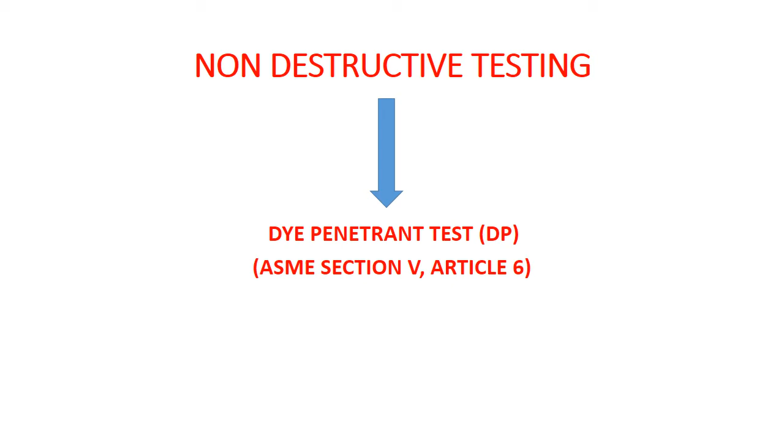Dye penetrant test is one of the techniques in non-destructive testing, and the code of procedure for dye penetrant testing is ASME section 5 article 6. ASME means American Society for Mechanical Engineers, section 5 is non-destructive testing, and article 6 is the dye penetrant test.

Why this dye penetrant test? Because it helps identify surface opening defects like cracks, blowholes, pinholes, porosity, etc. The basic principle of dye penetrant test is capillary action.

In dye penetrant test, what is penetrant? Penetrant is a colored, low viscosity liquid. Viscosity is the resistance to flow of liquid. The viscosity of a good penetrant is 0 to 5 centistokes, and the temperature limitation is 5 to 52 degrees centigrade.

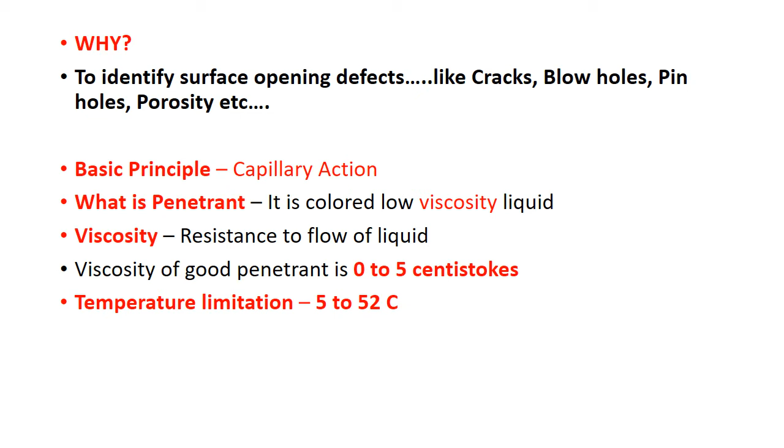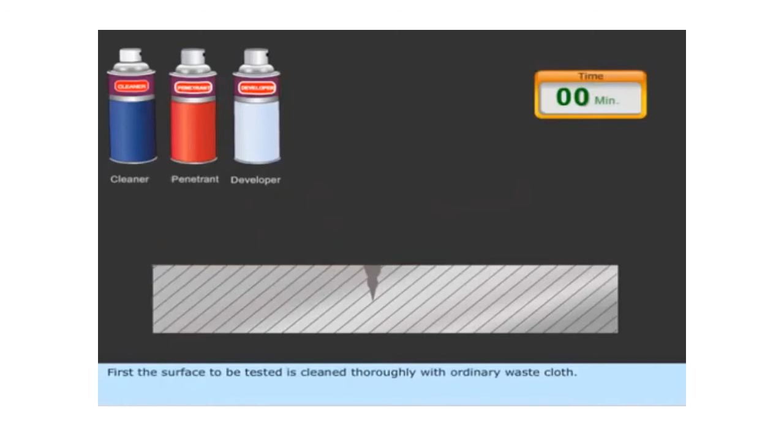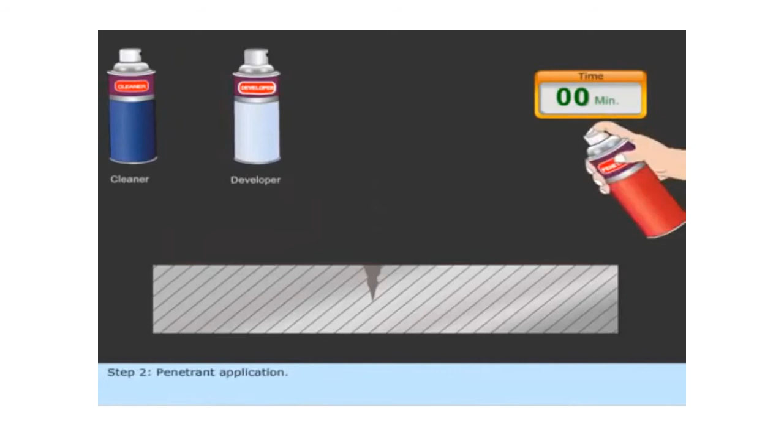In this video, you can see how this process is going on. Step 1, cleaning: clean the surface thoroughly with waste cloth by applying cleaner. Step 2, penetrant application: apply the penetrant with 1 feet distance and 45 degrees angle, and wait for the dwell time of 10 minutes.

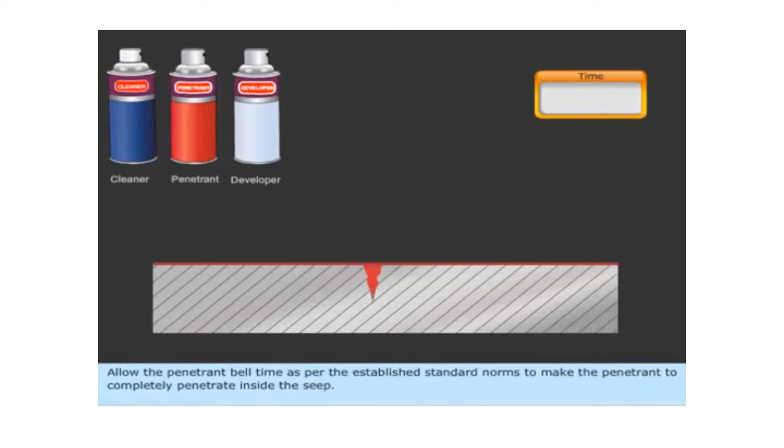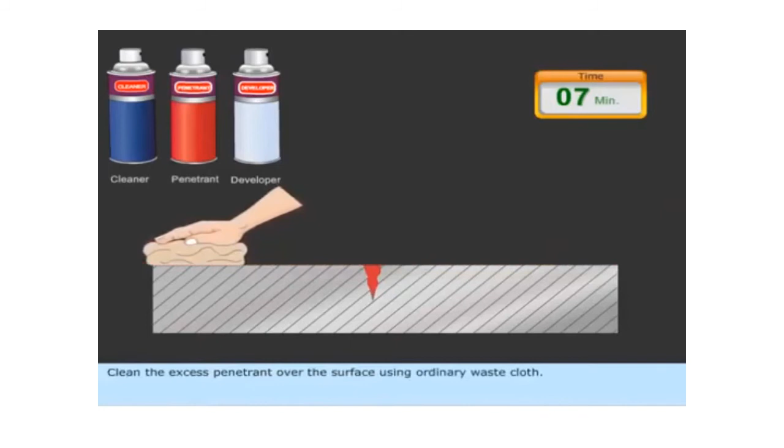Step 3, removal of excess penetrant: clean the excess penetrant over the surface using the cloth. Again clean the surface with the cleaner applied cloth.

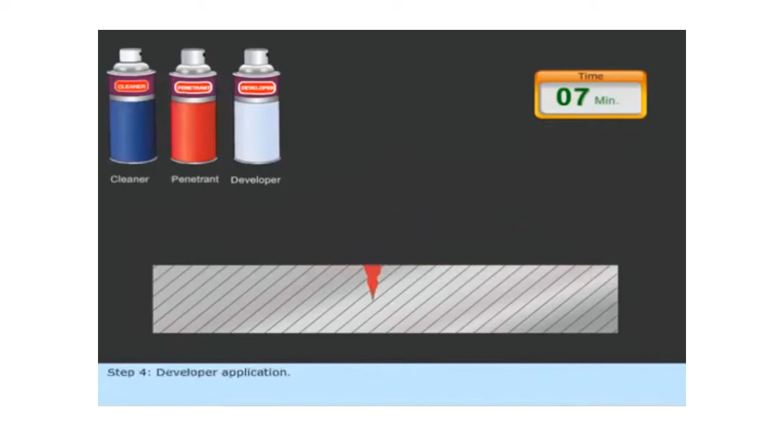Step 4, developer application: apply the developer over the surface and wait for the dwell time. Now you can see the defect indication.

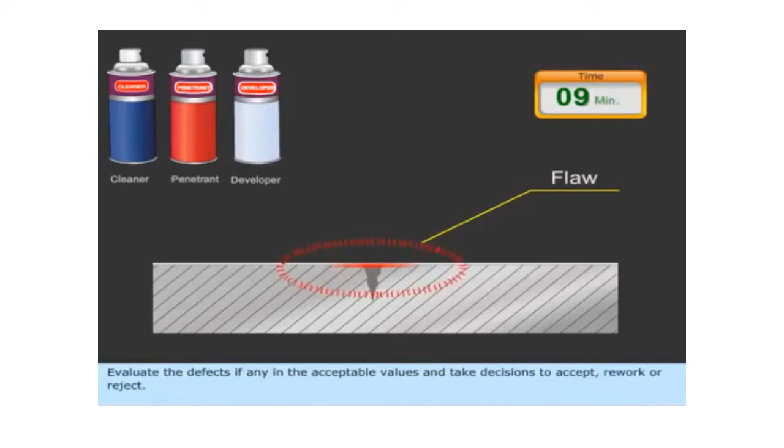Coming to the theoretical class, what is the procedure for dye penetrant test? First, surface preparation; second, application of penetrant; next, penetrant dwell time; excess penetrant removal; dry time; application of developer; developer dwell time; inspection; report writing; post cleaning.

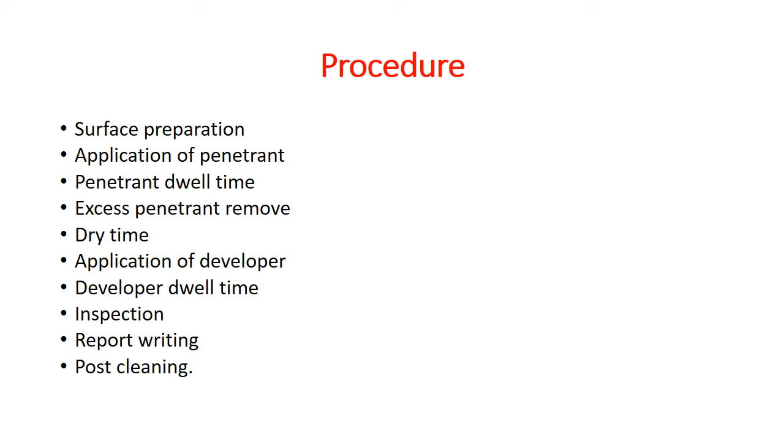So, types of surface cleaning methods. We have a variety of surface cleaning methods here: solvent cleaning, steam cleaning, ultrasonic cleaning, and sandblasting.

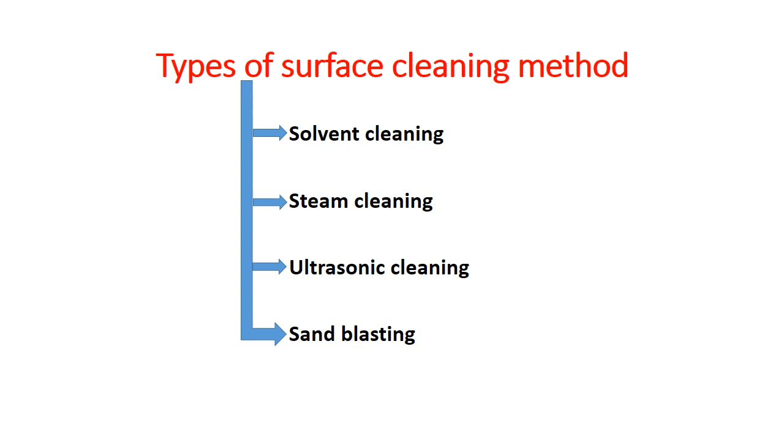Types of penetrants: we have two types of penetrants, that is fluorescent and visible.